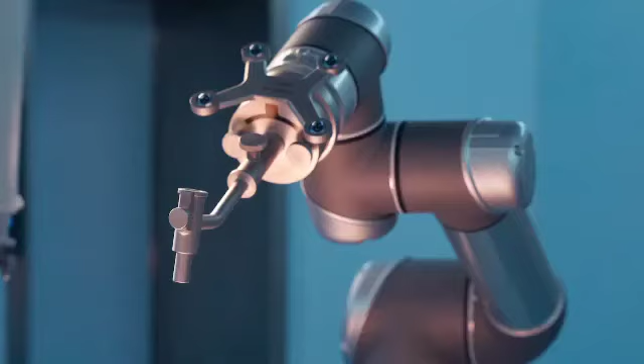The robot is unique. It is the only robot in the world that can perform an orthopedic operation on the limbs, pelvis, and spinal column. It's a 3rd-generation medical assistance robot, a leading machine in its field globally.

Some 1,000 kilometers west of Jinan, in the ancient city of Xi'an, another important surgical procedure is in progress. This is an operation to repair a damaged chest wall. Huang Lijun, Thoracic Surgery Department Director, will perform it.

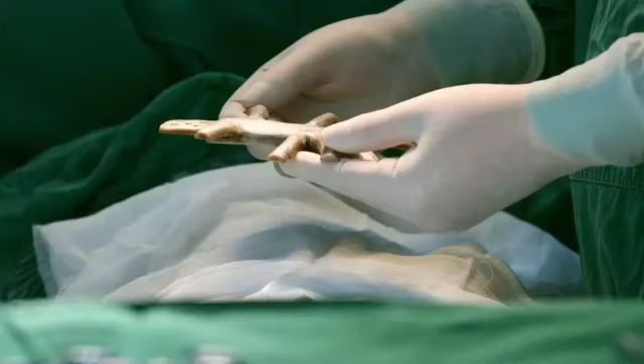He will implant a piece of artificial bone. The artificial bone is made with remarkable new technology. The patient's chest was seriously injured in a car accident.

Researchers have fabricated an artificial breastbone and rib section from polymer materials, molded by a high-energy laser beam. The artificial bone was printed layer by layer, enabling it to be as complex and intricate as its natural equivalent. The artificial bone owes its existence to 3D printing technology that is now revolutionizing manufacturing.

It takes him half an hour to reach the coalface 100 meters underground. Were this an ordinary mine, he would soon be as black as coal. This is no ordinary mine, however.

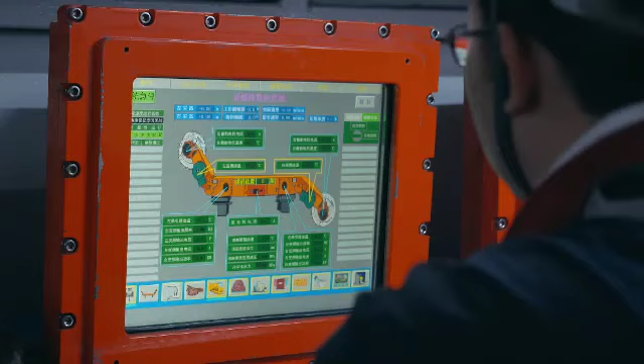Zhang Jie steps into a control room and turns on the machine he will operate. A few dozen meters away, it comes to life, with a roaring like thunder. The earth shakes, and soon it is ploughing into the coal seam.

The machine can mine 30,000 tons of coal a day, equal to the output of 1,000 traditionally equipped coal miners in a month. It can work non-stop in dark, humid and dangerous underground tunnels. It is China's largest automated miner, the MG2660 intelligent coal mining machine.

China overtook the United States in car sales in 2009. It has since been the global industry's biggest market. A decade later, in 2019, China was manufacturing well over twice as many motor vehicles as the US. Doing so didn't just require a giant industrial capacity, special equipment was needed too.

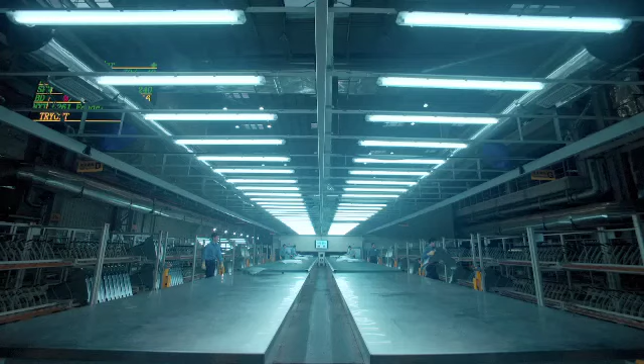At an automobile factory in the central city of Wuhan, a high-speed intelligent stamping system is operating day and night. Component inspector Yue Xuan is checking on the quality of its output. The intelligent stamping line can stamp 15 pieces of vehicle paneling per minute, making it possible for China to continue as the world's largest automobile producer.

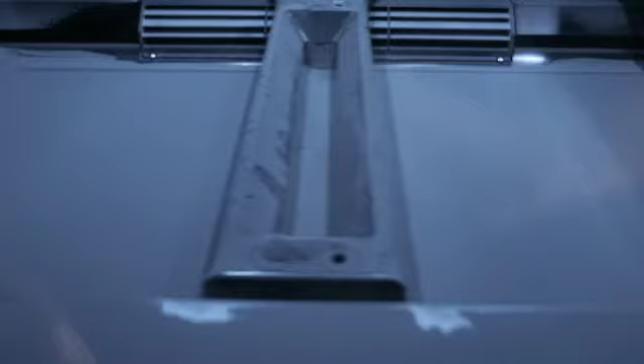It is the world's leading high-speed intelligent stamping equipment. The world's leading orthopedic surgery robot, cutting-edge 3D printing, automated comprehensive coal mining machinery, and the world's most advanced intelligent stamping equipment. Intelligent manufacturing is creating infinite possibilities for China's future.

In the orthopedic operating room in Jinan, the patient has been anesthetized. Lin Hua Shui is checking a 3D X-ray scan to finalize the procedure's plan. Next to him, the surgery robot has been wrapped with sterilized film, ready to fulfill its mission.

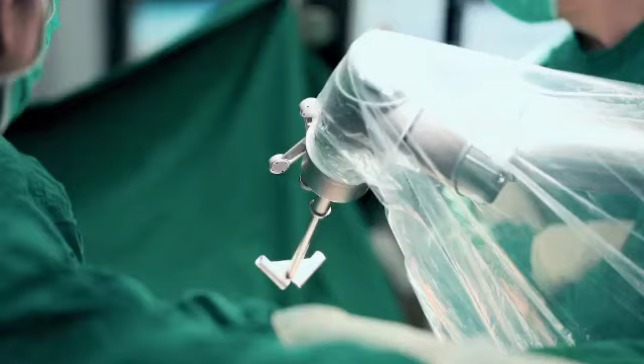The patient was injured in a car accident. Her whole pelvis was broken. A bone fragment is stuck in here, and if we don't deal with it properly, she'll become a cripple. After some discussion, we concluded that in this operation, the surgery robot can help to insert a screw.

In fact, 400 kilometers to the northwest in Beijing, similar operations have been performed countless times. Xu Jin, the Research and Development Director of the orthopedic surgery robot, knows its every function.

The biggest challenges for doctors in minimally invasive operations are the limits of eyesight and the instability of hands. No matter how skilled an orthopedic surgeon is, his vision can't penetrate human skin to see the internal structure of bones, and his hand movements can't be accurate to a level of microns.

In orthopedic operations, if a screw isn't accurately inserted and touches nerves or blood vessels, the patient may be paralyzed or even die. This kind of risk in operations has been unavoidable.

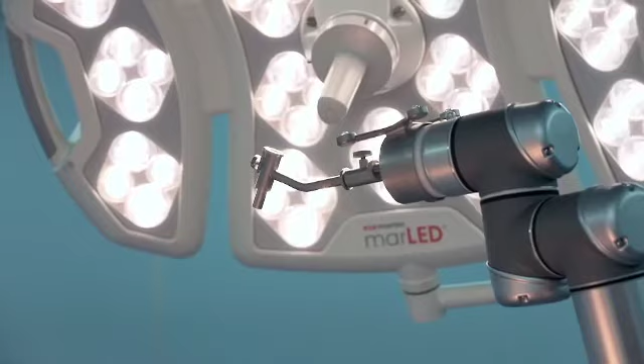The orthopedic surgery robot, however, is not subject to human limitations. Its optical tracking cameras can see the bones under human skin and tissue. Its mechanical arm can perform surgery to a precision of 0.8 millimeters.

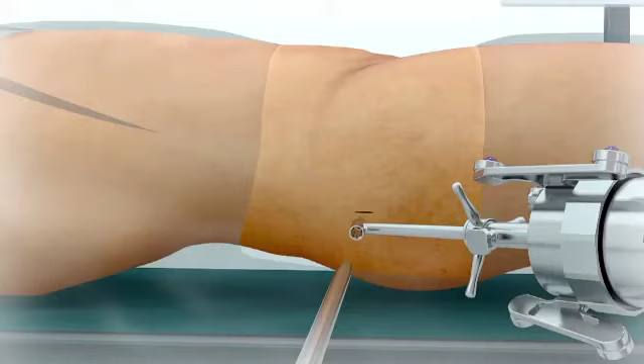Its central processing system is like the brain that processes the information fed into it by the tracking cameras before directing its arm to perform surgery to a degree of accuracy that is beyond any human.

Imagine a black box with a pearl at the bottom. We need to send tweezers in through a hole in the top of the box to fetch the pearl. The robot is designed to assist the operator to see the scene inside the black box, to fix the position in real time, and to complete the task with a very steady arm. Only with these requirements can the task be carried out.

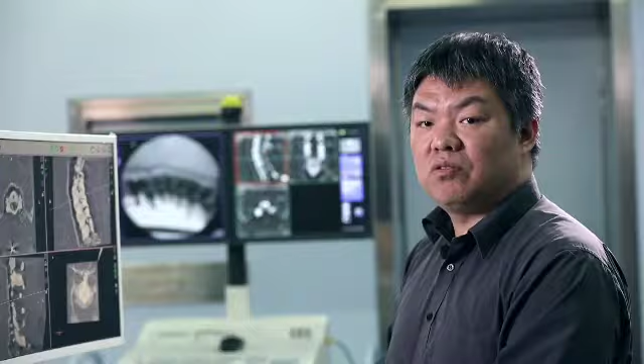The surgery begins. Liu Hua Shui makes a small incision. After carefully consulting the scan, he sends the operation command. Will the orthopedic surgery robot conduct the operation accurately and successfully as expected?

Xi'an's famous giant wild goose pagoda lies about 4 kilometers south of the old city walls. It was built over 1300 years ago to house sacred scriptures. Its brick, square pavilion structure makes it typical of the Tang dynasty.

Today, with 3D printing technology, it's possible to replicate it in perfect miniature without picking up any bricks or tiles.

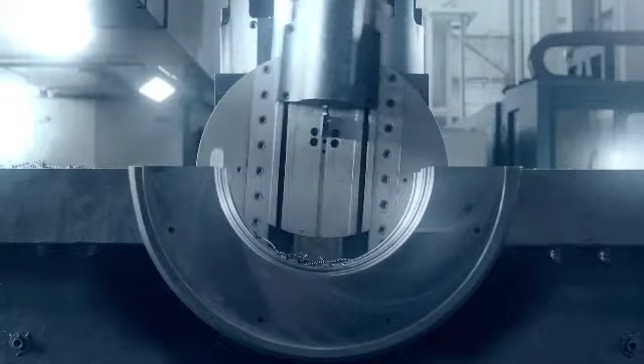3D printing is also known as additive manufacturing because it creates objects by depositing a material, one layer on top of another. Subtractive manufacturing means to bore, mill and cut out parts, so that original materials are reduced in size. Equal manufacturing means working on a piece of material over and over, without subtracting or adding anything to it.

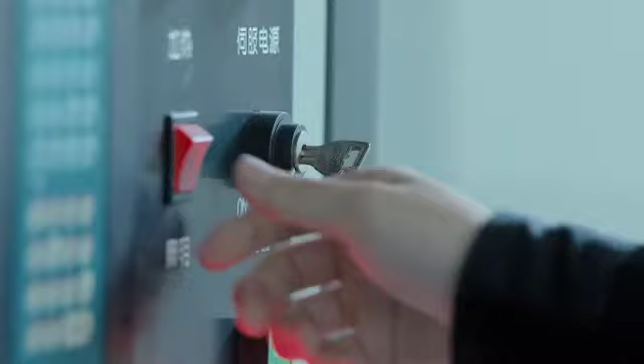Additive manufacturing, or 3D printing, works by irradiating a powdery metal or polymer material with laser beams to form molten pools of the material. These pools then solidify, and with the movement of the laser beam, they are added, quickly accumulating to fabricate the final object.

If a bird is like a craftsman, the process of building a nest is a process of getting additional materials. Its beak is like the 3D printing machine, and its nest is the final product. But we manufacture more complicated models than nests, and with better quality.

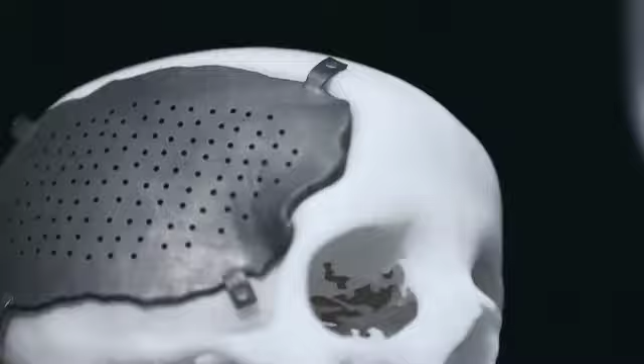Lu Bingheng, a leading figure in the National Innovation Institute of Additive Manufacturing, has over 20 years' experience in 3D printing. For his team, printing a miniature of the giant wild goose pagoda is nothing more than a small trick. Now, with the help of biological 3D printing, their aim is to rebuild damaged bone in the human body.

Every person is a unique individual who can't be replicated. But the human body is symmetrical. If we lose part of our bones in a car accident or because of disease, can we replicate the missing portion from its mirror equivalent and implant it?

We can make an operation plan beforehand. We can restore the defective right side by copying the intact left side with a 3D printing machine. We can print out an implant. The application of 3D printing to medicine will outmode traditional ways of treating patients and performing surgery.

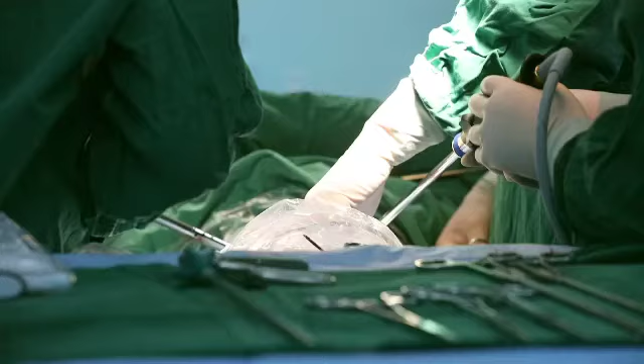The thoracic surgery proceeds well under the direction of Huang Lijun. Before the operation, based on a CT image of the intact part of the patient's breastbone area, Lu Bingheng's team and Huang designed a 3D digital model for his artificial breastbone and rib section.

When an artificial implant is made, a series of complex issues such as materials to be used, toxicity, and rejection must be taken into account. For material, the surgeons, in this case, needed to research thoroughly to decide whether to use titanium alloy or a new polymer material.

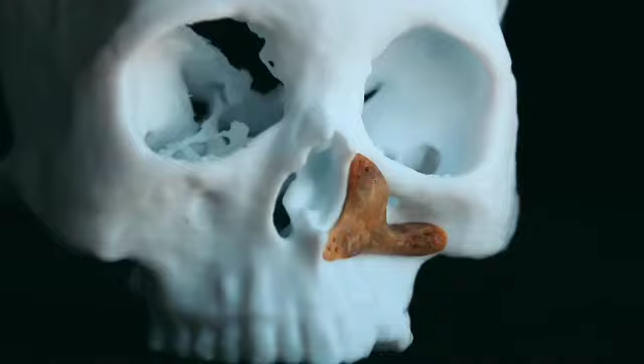Titanium alloy has better biocompatibility and fewer side effects, but there can be problems. For example, if the skull is injured and we use the titanium alloy to mend it, the patient may feel his or her head is cold. Metal has high heat conductivity and is influenced greatly by outer temperature.

PEEK material, by contrast, is more like human bone. In terms of strength, it's even better than bone. PEEK, short for polyether ether ketone, is an organic thermoplastic polymer with a similar hardness to human bone and good biocompatibility.

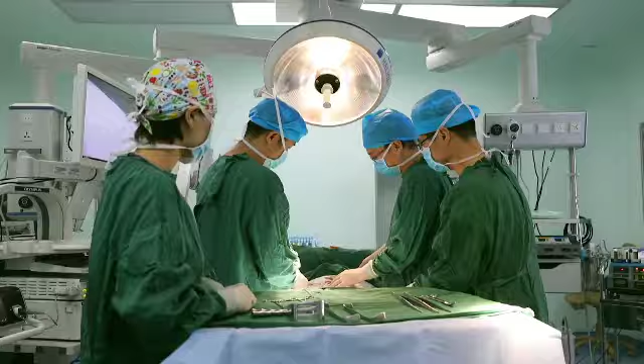Huang Lijun has performed operations successfully with this material. Artificial bones made of PEEK material were printed out precisely and implanted into his patients' bodies.

In the past, it was very difficult to repair large chest wall defects. But in recent years, with the development of technology, especially 3D printing technology, we've seen its merits and applied it to the rebuilding of chest walls. With this powerful modern technology, we can now save more lives.

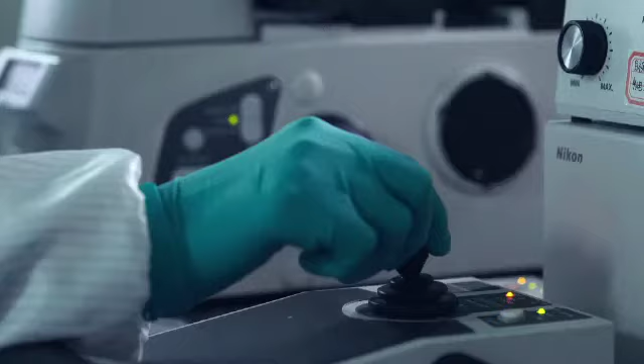For Lu Bingheng and his team, the joy felt on hearing the operation was a success has already given way to thoughts about their next step. In China, over 200 operations like this have been successfully performed. Their ambitions now lie in going further.

We'll focus on biologically active tissue. The human body is one big piece of tissue with lots of holes. Liquids like blood and bodily fluids flow through it constantly. The next problem is to make sure 3D printed tissues can function normally in terms of bodily fluid flow and neuron growth.

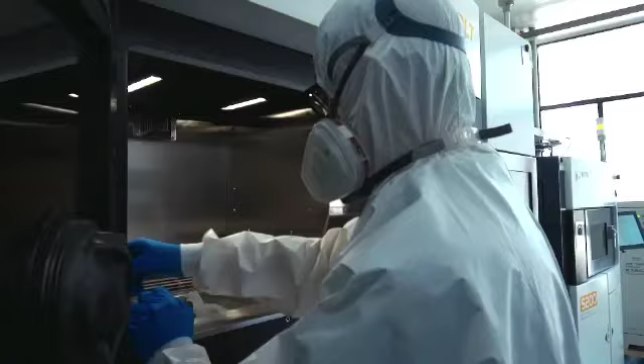One hot area today is how to manufacture biologically active organs, including artificial skin, cornea, and cardiac valves. Regenerative medicine has made impressive progress with 3D printing. It's now possible to produce biologically active organs to research into genetic science. As a result, lifespans should be increased, with organs staying healthier longer.

Back in Shanxi, Zhang Jie's intelligent mining machine is shearing off tons of coal underground. In the provincial capital, Taiyuan, meanwhile, the factory that created it continues with development.

The MG2660 intelligent coal mining machine is 16.9 meters long, 6.4 meters high, and it weighs 166 tons. 4 slipper legs rest on rails to move it back and forth. Each of 2 rocker arms raises and lowers a shearing roller, spinning at high speed to cut through the coal seam.

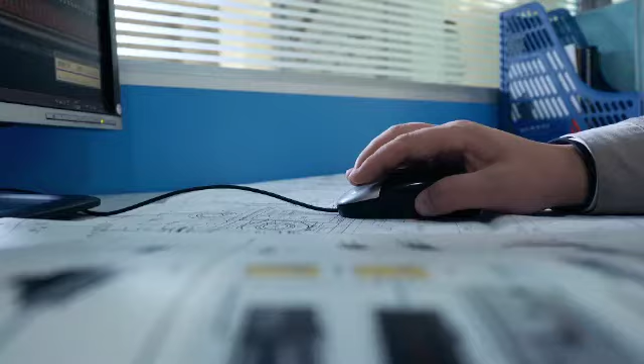To work intelligently, the first thing the machine must do is recognize a coal seam. Otherwise, rock will be sheared along with coal, reducing its quality, damaging the equipment, and even hindering the normal operations of the mine.

Recognizing a target object or material and telling it apart from what is unwanted is a basic problem in artificial intelligence. In this case, how is it achieved?

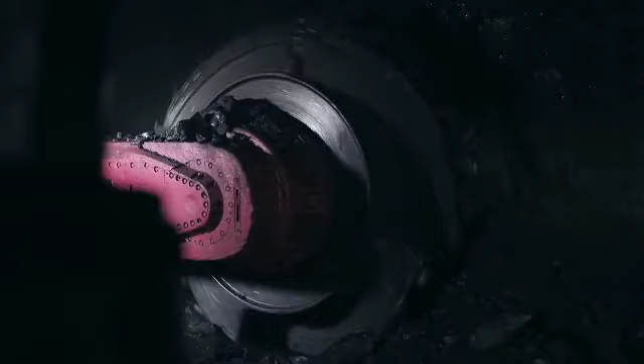Hao Shangqing is a senior engineer with over 30 years of experience. To tackle the problem, he has done research all around China and consulted many geologists and industry experts. In the end, he worked with China University of Mining and Technology to arrive at a solution.

Seismic wave receivers are arranged in the tunnel, and seismic waves are used to detect where coal is located. Sensors attached to the machine's rocker arms recognize the different vibration frequencies of rock and coal. Then, with the help of an inertial navigation system, the machine can alter its positioning of the shearing rollers to avoid rock.

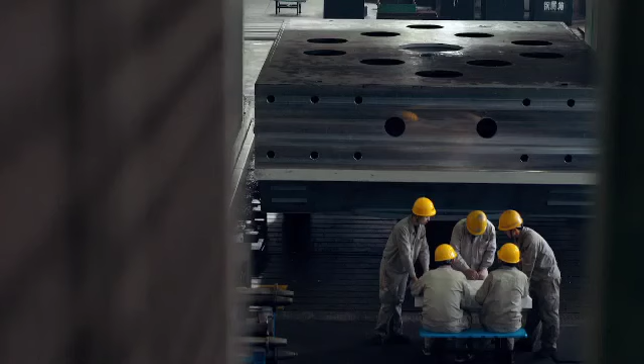Detection with seismic waves is like a CT scanning of the coal seam. The sensors are like the human nervous system, and the inertial navigation system is the human visual system. When the intelligent mining machine works underground, it'll cut and collect coal and avoid rocks.

Spinning at high speed, the mining machine's rollers feature hardened metal claws with a weight of 12 tons each. The rocker arms must support this weight, so stability is a challenge.

When the machine was first designed, the weight of each of its rocker arms was 24 tons, which rose to 37 tons with the addition of a 13-ton shearing roller. Since the 2 rollers move towards the same side when the machine is working, it might lose balance and even overturn.

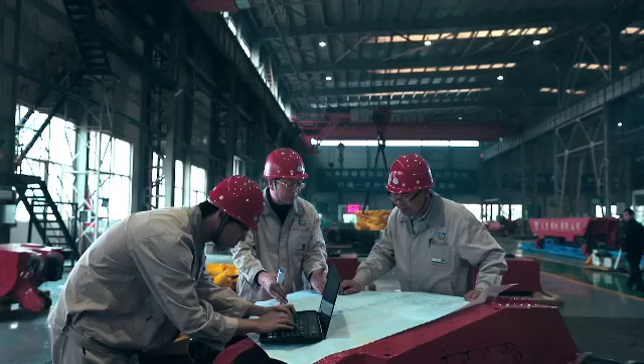Engineer Zhang Ming Li redesigned both rocker arm and roller to reduce their weight. His calculations took into account the geological environment of the mine and the force-bearing conditions of the machine.

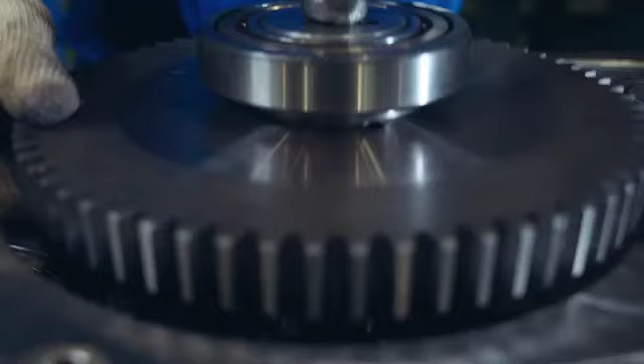Through data analysis, the combined weight was reduced to 35 tons. The structure was improved, the hardness of the metal increased, and the weight of the machine is now at a perfect standard.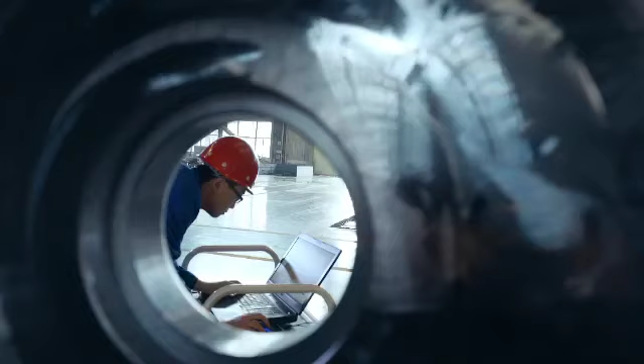Zhang Zhenjie, a technician in a machining workshop, is doing a tolerance test on the rocker arm frame. This is a precision test that must be performed after the rocker arm frame is finished. Through an accurate testing of points, lines and planes, errors arising in the machining process are revealed.

As he makes small adjustments, data on the smoothness and surface finish of the frame are being displayed on his computer to a level of microns.

Development of the intelligent coal mining machine will continue. Engineers in China still have much work to do to make it more intelligent and powerful.

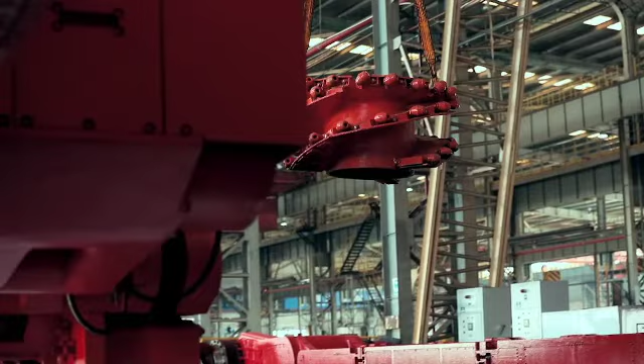In a car-making factory in the central Chinese city of Wuhan, a high-speed intelligent stamping system is working around the clock. Automobile manufacturing is normally made up of stamping, welding, painting and assembling processes. The technology of stamping is considered the most important because over 70% of components are produced that way.

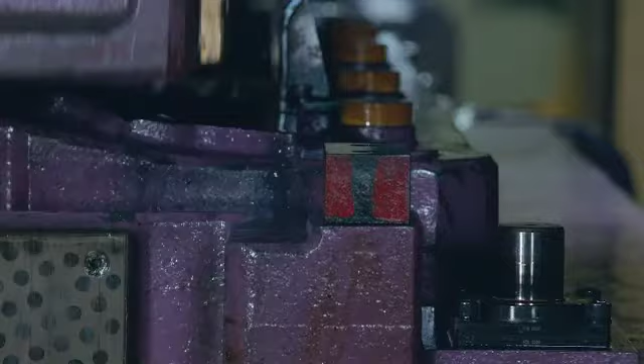A stamping line includes 4 multi-connecting rod press machines, a 2-arm feeding system and an unstacker. To build it, essential technologies applied include a hydraulic NC cushion, a simultaneous control system, an automatic mold changing system and a whole line protection system. It represents the world's most advanced stamping technology.

The stamping system itself is produced in Jinan. The factory that made it has a history of over 8 decades, meaning it has witnessed great changes in Chinese industry.

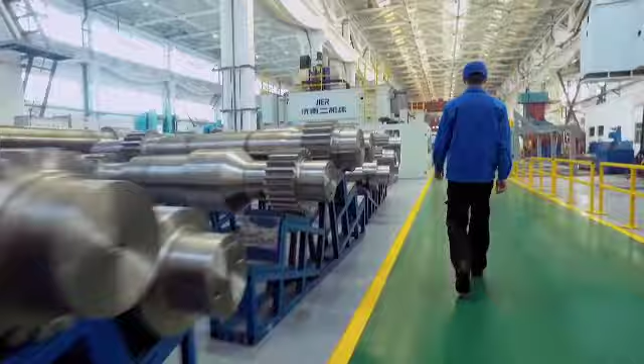Today, the factory is running smoothly, and Xing Youjie is spending the morning in the gear workshop. A graduate of the Shandong University of Technology, he started work in the factory 6 years ago. He operates 3 machine tools by himself.

The large gears produced by these machine tools will be installed as core components of the stamping system, at the heart of its work, turning out 15 automobile panels per minute.

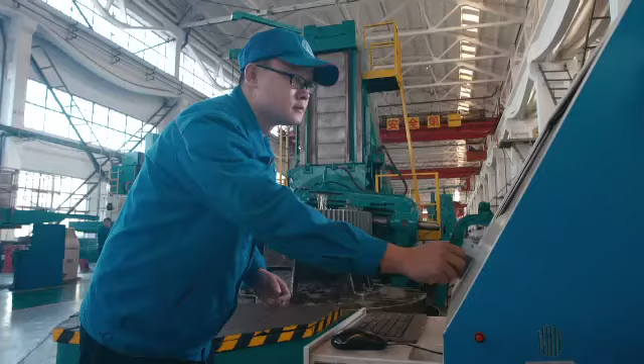As usual, Xing logs into his computer with his personal data card. Technical drawings of gears in process are stored in the computer, and only he has the authority to see them. After retrieving the drawings, he sets the machine to operate.

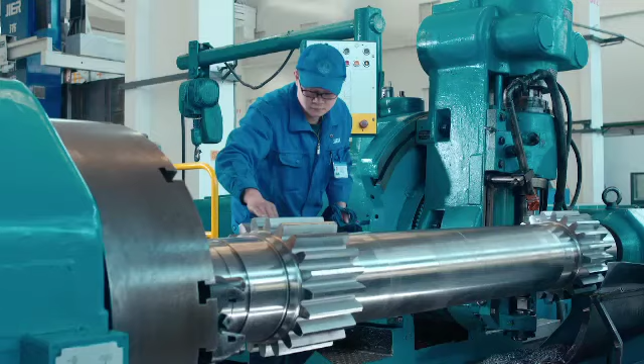6 years ago, when he started working at the factory, the setup was completely different. In those days, the first thing he did after arriving at work was to borrow the drawings from the design room. But very often when he arrived there, he would find other workers had already taken them, so he would have to go and look for them.

Now we store drawings in the computer. With this information card, I can find the ones I want. In this way, the drawings will not be lost, leaked, or tampered with.

Now all Xing needs to do is input a command, and the 3 machine tools will start to operate automatically. Paper drawings are a distant memory for him.

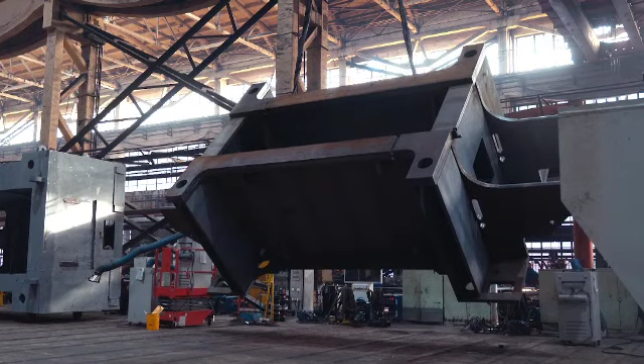At 10:30 a.m., 4 hulking metal shells are lined up in the welding workshop. They will be welded into the main beam of the stamping machine. 4 welding robots will complete the task. Each piece of precisely cut thick steel plate is tightly welded, and each welding joint is even and neat.

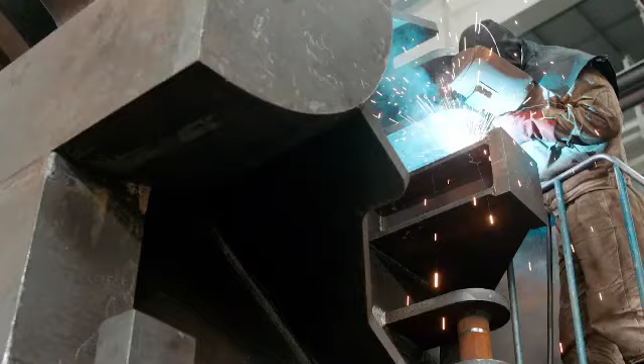Wang Yong is a senior technician. He has been welding for 30 years. Today, he doesn't need to wield a hot torch and sweat behind a heavy protective mask. Instead, no matter how delicate the task is, all he needs to do is input a command, press on a remote control, and welding robots will do the rest.

In the past, we did the welding work manually. It was normal to burn our feet or hands. But now that rarely happens, because robots replace us to complete the work. They are highly efficient, and the work is finished with better quality and a nicer appearance.

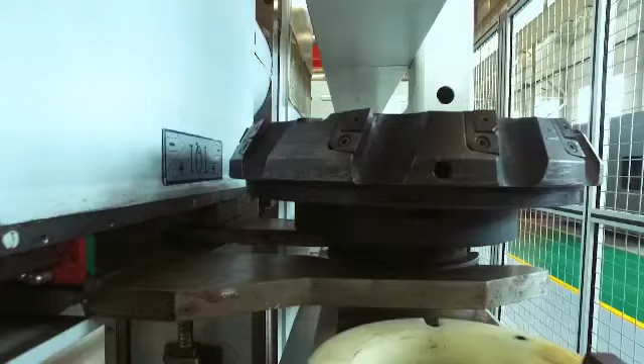In the afternoon, in a heavy processing workshop, a CNC planer-type milling machine is about to change tasks. An intelligent automatic tool changer will change its tool bit. Its mechanical arm picks up the new tool bit, a circular cutter head, and passes it to the milling machine before removing the old tool bit to precisely install its replacement, then deposits the old tool bit safely in a rack.

Zhang Lei is an operating technician of the planer-type milling machine with 13 years of experience. After the changing of the tool, he restarts the machine. For him, the biggest difference these days is that his uniform is always clean.

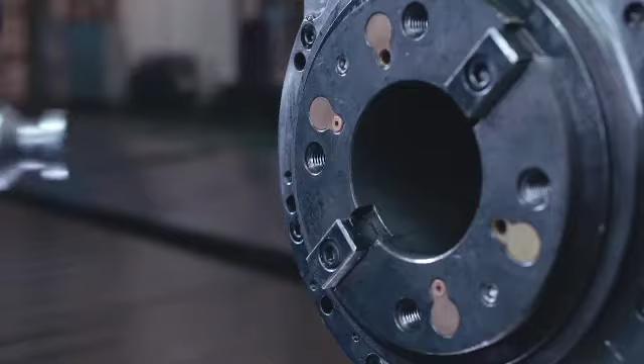In the past, human workers changed the tools. The tools were too heavy for Zhang to lift with his hands only, so he had to use his chest and belly to assist. After completing the task, he was dirty all over.

But now the intelligent automatic tool changer will complete the tough task. Zhang Lei doesn't even need to go down to the factory floor. He can remain up above, with tablet in hand, to input the required commands. The tool-changing machine will then proceed by itself.

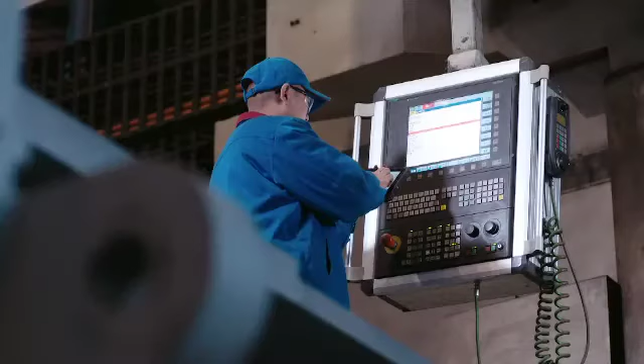Now, all I need to do is press the button, and the tools will be changed precisely. We are also equipped with a tablet to consult the drawings. We don't need to climb ladders to fetch them.

Paperless gear workshops, intelligent automatic tool changers, and welding robots are all upgrading manufacturing. Manufacturing is becoming safer, more intelligent, and more efficient. We don't just produce an intelligent stamping system and an automatic feeding system. The whole manufacturing process is paperless, intelligent, and automatic. It's in line with the call for smart technology in our country.

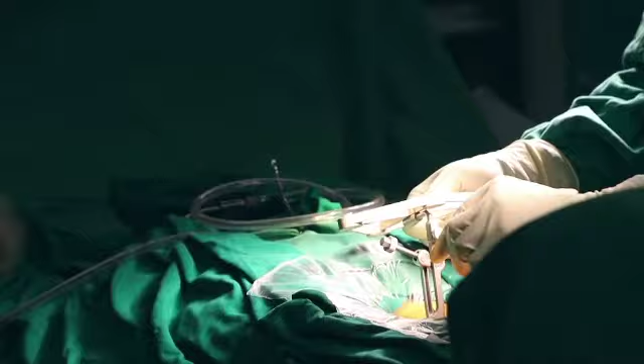Elsewhere in Jinan, the pelvic fixation operation performed by Liu Huashui is underway. 3D scanning data of the area to be operated on is being fed in real time into a central processing system. The orthopedic surgery robot will carry out the operation following Liu's plan.

Before the operation, the robot's mechanical arm tracker must be accurately calibrated. A 3-coordinate measuring instrument is used to test its positioning accuracy.

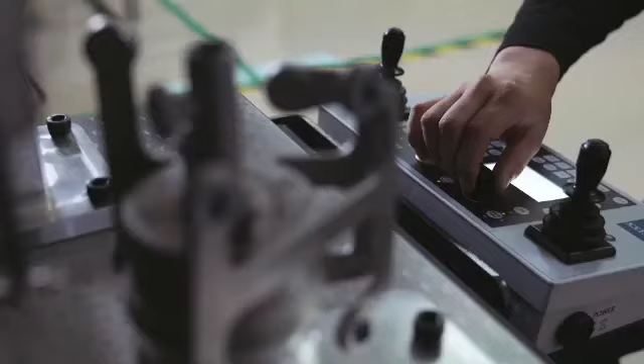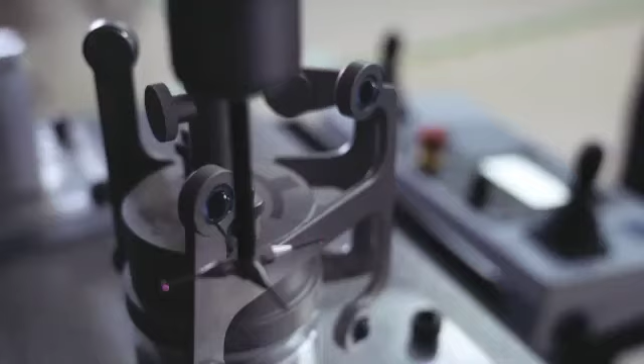Even in a state of deep anesthesia, a patient's breathing and heartbeat will cause their body to sway. Swaying, no matter how slight, makes accuracy harder. This sway, therefore, has to be factored in as the target site of the operation is tracked in real time. The central processing system uses the real-time data to control the robot's operating arm for subtle adjustments to compensate for the patient's body sway, improving the accuracy of the surgery.

As a doctor, I know the limits of our hands and eyes. The orthopedic robot helps us complete complex operations in body areas where the human doctor can't see or touch.

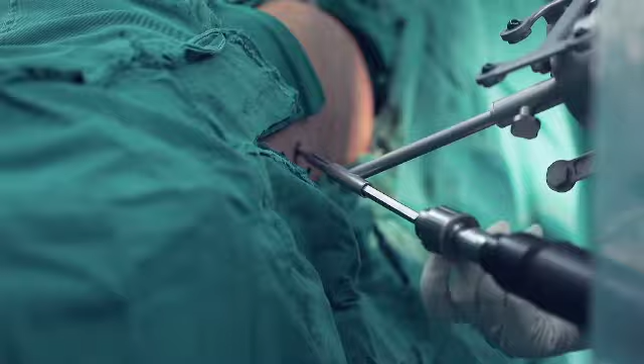The operation has reached a crucial moment. The robot directs its surgical tool to the required place and inserts a screw to a precisely predetermined depth from a precisely predetermined angle. Upon the lead surgeon's confirmation, the screw is fixed. Finally, the operation site is X-rayed again. Liu Shedong and Liu Huashui confirm that the screw's position is exactly as planned. The operation is a perfect success.

The use of orthopedic surgery robots has turned orthopedic surgery, which was highly risky, into a scientific, quantitative and controllable medical practice.

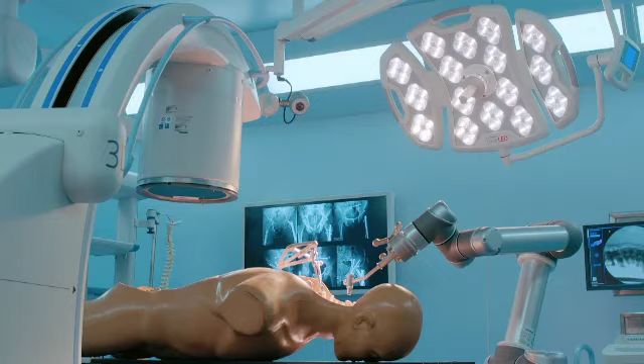A 9-year-old child was brought to the hospital by his parents. They carried him in, holding him up by his collar. They said he had been to hospitals all around China, but none of them would treat him. Later, they found a hospital that could treat him, but there was a huge risk of dying.

While talking, they let go of his collar by accident, and the boy fell down to the floor like mud. We were scared, but the parents were quite calm, and they said he'd be all right. The whole family suffered a lot.

During the operation, the robot pushed the screw to the predetermined spot according to our plan, and it was a huge success. At that moment, I felt really excited. I think intelligent technology is a capable helper of doctors, and it drives medical work from its second stage to a higher third stage.

In the National Innovation Institute of Additive Manufacturing in Xi'an, Lu Bingheng's team are working for their dreams. Meanwhile, thousands of miles away in Beihang University in Beijing, a team led by academician Wang Huaming is also working on printing complex metal structures.

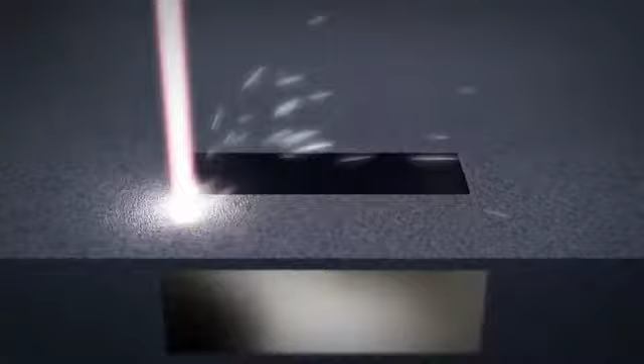Inside its protective case, the nozzle of a 3D printer sprays out a powder of micron-sized ultrafine metal granules continuously and uniformly. A high-energy laser beam irradiates the powder, melting it instantly to form a liquid molten pool.

After the laser moves on, the molten liquid solidifies quickly and forms successive layers. The layers pile up to fabricate the final object.

Because of their large size and complex structure, some of the key parts of spacecraft can't be produced in the traditional way of welding separately made sections together. Doing so wastes a lot of materials and is time-consuming and very expensive.

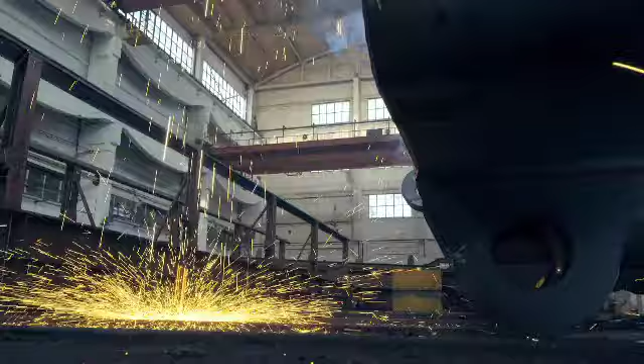Moreover, each welding seam will be a weak point and a potential hazard for the spacecraft when subjected to high G-forces.

It's very difficult to produce these large essential parts in a traditional way. Some technologies have almost reached their ceiling. Any further advance will cost a great deal. The loss outweighs the gains, so we need to change our approach, and things will become much easier.

An aircraft's landing gear is one of the most challenging pieces of equipment to make. When landing, the landing gear touches the ground first and has to bear an enormous impact. The performance of the gear is therefore critical to the safety of the entire aircraft.

Manufactured in the traditional way, landing gear will be composed of dozens of assembled components. With the method of Wang Huaming's team, however, a large and complex metal part can be 3D printed as a whole.

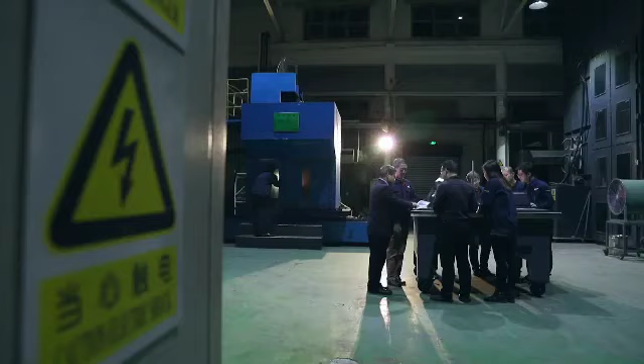It will not suffer from structural weaknesses hidden within its equivalent part made using the traditional method.

During the 3D printing process, the metal powder melts instantly when irradiated with a high-energy laser. And just as important, when the laser moves on, it solidifies quickly too.

Through quick melting and solidification, the crystalline interior structure of the finished part turns out to be even, with a better performance by all measures than parts made in the traditional way.

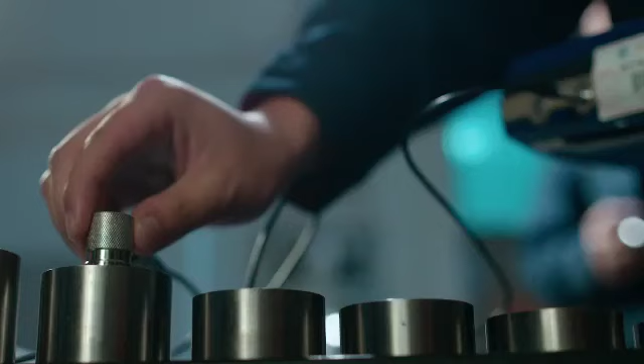The key to this problem is to make it cool down and solidify quickly. It is a frontier technology in areas of both metal material and condensed matter physics.

To date, 3D printing technology has been widely applied in aviation, spaceflight, and military fields. It is used to provide key components for satellites, spacecraft, Mars probes, space stations, and aircraft carriers.

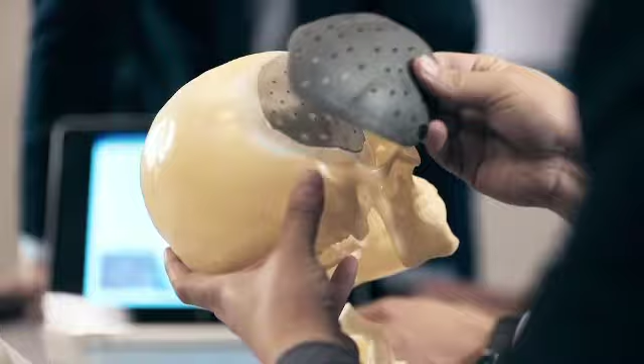At the National Innovation Institute of Additive Manufacturing, researchers continue to work on their terrestrial goals. Lu Bingheng, meanwhile, is thinking about how to get 3D printing technology to work beyond this, in outer space.

We can do some work in the space station in outer space or on other planets. If old equipment or parts are worn out or damaged, one way is to print them out on Earth and send them to space, which is very costly.

Why not take a 3D printer into space? If the space station needs something, the printer can print out a component, and then the old one can be replaced. This way is more cost-effective.

What's more, we could print out a giant solar power station in space by 3D printing and get lots of energy. Then we can transfer some production into space, making full use of space and the energy there.

All we need to do is send some powder materials into space, and we can print out high-speed trains and planes there and send them back to Earth. It'll save us lots of energy and land.

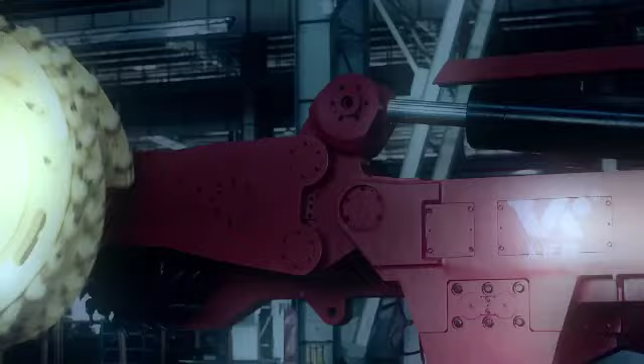The 23-ton rocker arm is in place. Zhang Wenjun attaches sensors to its surface. Then he will apply mechanical pressure to test its bearing capacity.

All indicators show that its bearing capacity is extraordinary and up to international standards.

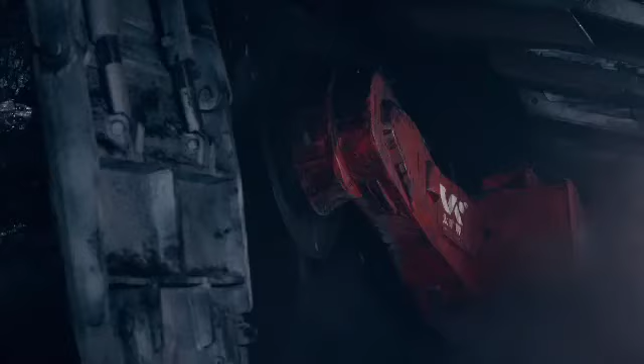Equipped with smart eyes to recognize coal automatically and its powerful coal shearing roller, the mining machine is in fact one of a team of 3 equipment systems needed to achieve a daily output of 30,000 tons of coal.

The other 2 systems are a scraper conveyor and hydraulic support jacks. While the intelligent miner digs coal, the scraper conveyor transports the coal, and the hydraulic support jacks set up its working space to ensure digging and transporting proceed safely and smoothly.

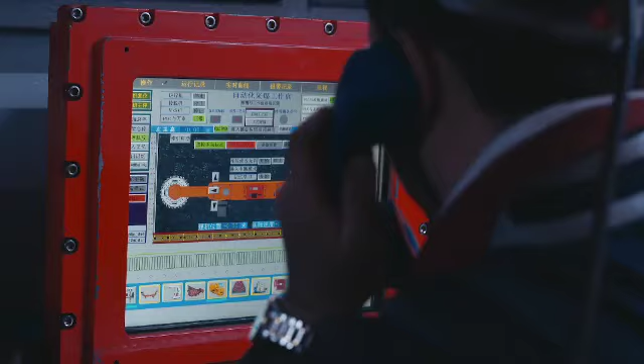In the control center, Zhang Jie is operating the mining machine. A sensing system perceives the spatial relationship between the 3 machines, controls their moving speed, and coordinates them to work in harmony.

The intelligent mining machine has usurped traditional methods of coal production. As a 3rd-generation mine worker, Zhang Jie no longer needs to physically handle coal like his father and grandfather did. He only needs to operate the machine in a clean and safe environment. Science and technology are indeed turning our dreams into reality.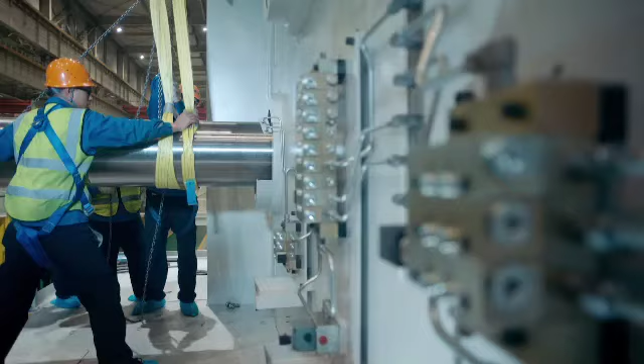At the stamping machine factory in Jinan, the beam installation work of an intelligent stamping machine is in progress. Afterwards, bearing and eccentric gear to power the machine will be installed in the beam cavity. Physical strength used to count in manufacturing, but the power of modern machines comes instead from human ingenuity. Once the bearings and eccentric gear are securely in place, the installation of the machine's piping begins.

The interval between the pipes, whether straight or curved, is constant, and each curve has the same radian. The piping, indeed, is like a stave on which music flows, a symphony to the dedication of its creator.

Xiao Tianfei, the piping's installer, liked painting when he was a child. He entered competitions but failed to find success as an artist. 6 years ago, he graduated from technical college and became a pipeline assembler.

I feel painting and assembling are equivalent. Pipes on equipment are like the lines in sketches. They are artistic. For me, my job and my interest are combined. My dream has come true.

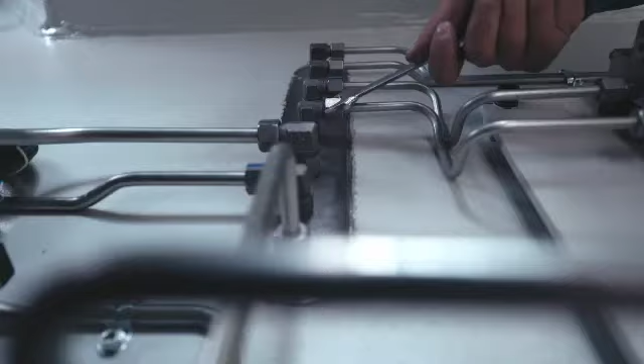It is not only the pipes installed by Xiao Tianfei that are perfect. All the fittings on the stamping machine are immaculate, as if the same master artisan installed them. Behind this industrial beauty are rigorous and international assembly standards. And because it meets these standards, the intelligent stamping line has won orders from top international automakers.

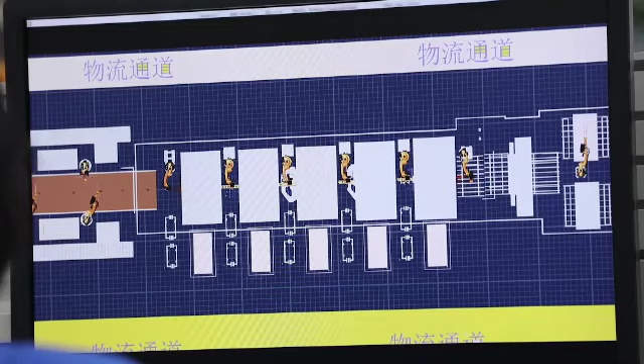This office is the design center of the factory, a concentration of its talent, wisdom and imagination. Wu Yudong, a senior engineer who participated in the creation of 8 stamping lines for the Ford Motor Company, still remembers the 8-year battle his team fought for a breakthrough.

The first stamping line we built for Ford was examined by a large group sent by them. A dozen foreign experts came here and asked us to disassemble the line for testing. When the 8th and 9th lines were examined, they only sent 2 Chinese engineers from their Asia branch for testing.

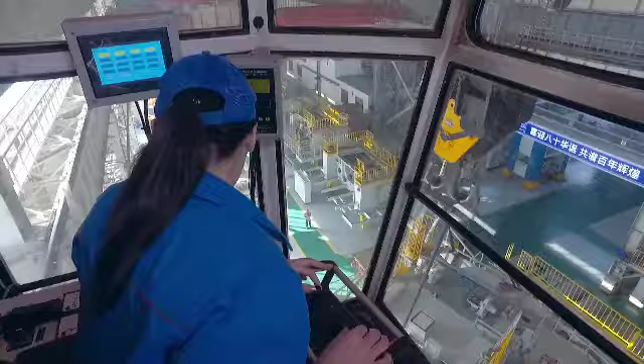Outside, it's a sunny day. Wang Xiaohan is sitting in a bridge crane control box 20 meters above the factory floor. When she looks down, the giant machines and workers look like scale models in a toyland.

This is Wang's 4th year at the factory. Now 22 years old, she is training an apprentice. When operating the 300-ton bridge crane, she can lift equipment weighing hundreds of tons. Today she is lifting the beam of a stamping machine. The beam has undergone all processing and installation procedures and will soon be shipped to a car factory to start its working life.

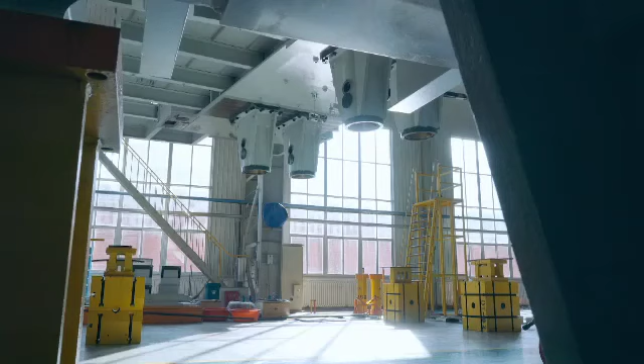In the car manufacturing plant in Wuhan, 5 large intelligent stamping lines are running at full speed. Yue Xuan's job as an inspector of parts will soon be taken over by a robot. His new role will be to be a good master.

The servo line is the most noticeable among the 5 stamping lines. The word servo comes from the Latin word servus, meaning slave. The line is not only intelligent and efficient, but also safe, controllable and stable. The word servo, therefore, expresses the wisdom of humans in balancing technological progress with mastery of the world.

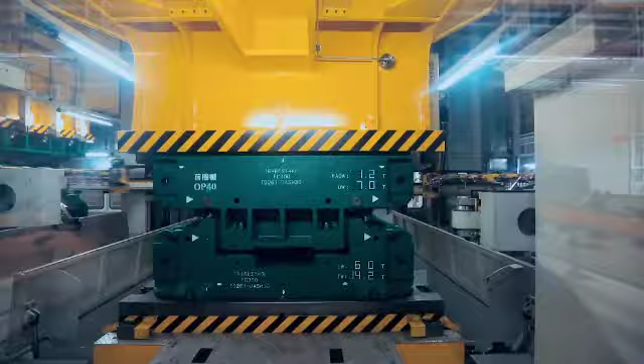You don't necessarily see your competitors as enemies. Although we compete with each other, we also cooperate. If there isn't a powerful competitor, our desire to compete and our motive for improvement won't be strong. The quality of our products has increased in the past few years. It is competition that has boosted the development of technologies and the level of management.

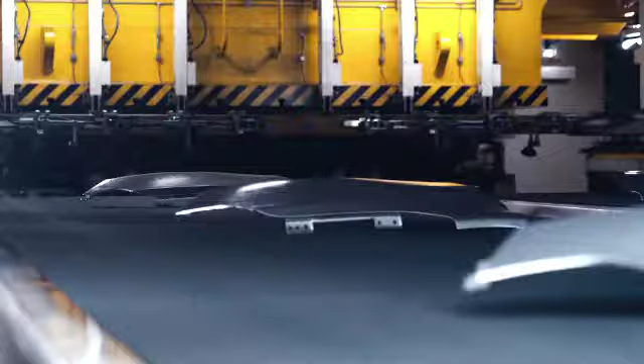Today, there are 9 intelligent stamping lines in total. The first 8 are operating at full capacity in 3 shifts. They make components for best-selling vehicles, including the Ford Raptor F-150, Transit and Explorer. Other top international automakers ordering the system include Volkswagen, Nissan and Volvo. This is truly win-win cooperation.

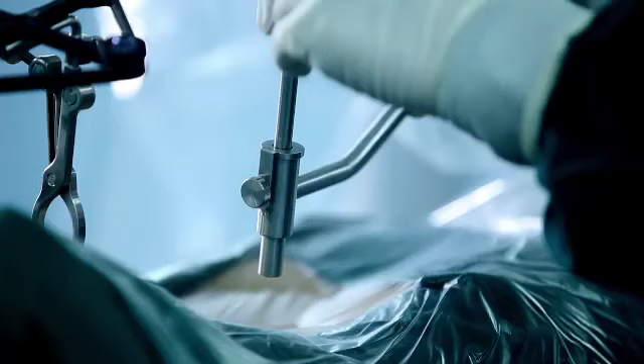From an orthopedic surgery robot that has revolutionized medicine in China, to 3D printing that has broken through the ceilings of traditional manufacturing. From an intelligent mining machine that has outmoded old methods of digging for coal, to a high-speed intelligent stamping line that has upgraded what it means to be made in China. All these marvelous achievements have their basis in ingenuity and innovation.

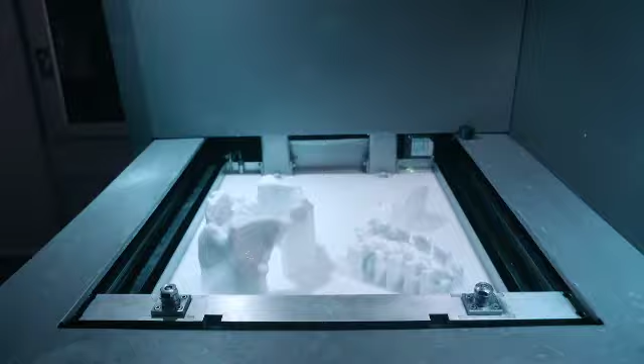In manufacturing, more and more intelligent production systems are becoming a reality. In factories, a new round of innovative research and development is underway. And on the streets, cars developed with 3D printing and manufactured by intelligent machines are improving both performance benchmarks and living standards. In China, the story of intelligent manufacturing has just begun.